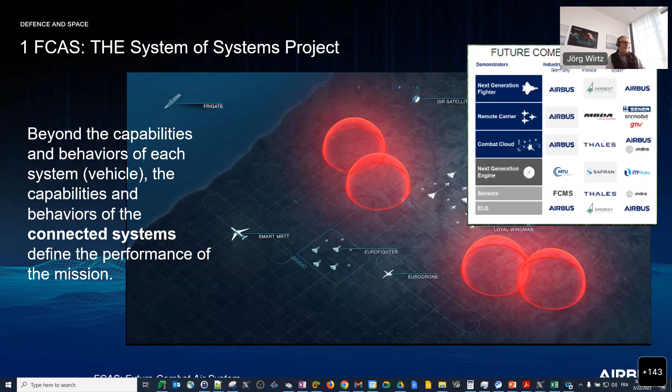Maybe in the next slide I just wanted to give one highlight about the enablement required for such a program, with all the companies involved, as you have seen. So in order to make this complex development happen, it does not work anymore to send files around per email. What we really require here is what we call the common working environment. So some kind of cloud-based environment accessible to all program partners so that they can collaboratively work on the elaboration of the deliverables of the development, the design, and so on.

This kind of working environment is a pillar, an item and a delivery item beside the fighter, the remote carriers and the combat cloud itself. And it shall allow this new way of working. In the focus we see, of course, a classical PLM environment, also a strong MBSE environment here with Cameo and DOORS. We will have an advanced software development environment to enable a CI/CD pipeline and collaboration features. Just to give you an overview that the enablement of tools and methods is key to make this ambitious undertaking work.

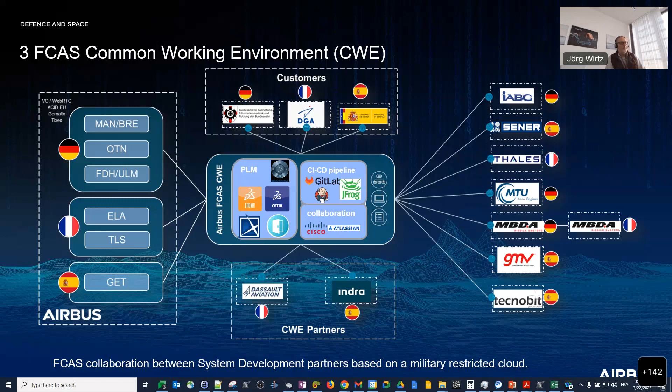With giving you this overview, I would then hand over to my colleague Dominique for the next slide. Thank you, Jörg.

Jörg explained really clearly the complexity of the context. So we have a system of systems to design, which is by essence very complex and composed of complex systems. And as you see also, the organization is rich and a lot of companies are involved which have to interact with each other in different countries with different national security concerns to be addressed.

So in this specific project, we have the system of systems level to be addressed, and this is exactly what UAF brings us. And the similar frameworks developed by the different Ministries of Defense, so NAF, MODAF, and DODAF, had this objective in mind when they designed the framework. So to be a support for capability acquisition entities, for example, NATO.

This is the concern, and keeping this concern in mind, we need all the notions and concepts offered by the UAF, which is approved by NATO. In this concern, we have things demonstrated this morning, for example, the capability roadmaps, identification of gaps, demonstrating how the system will be incrementally supporting the needs in the next 20 years, for example.

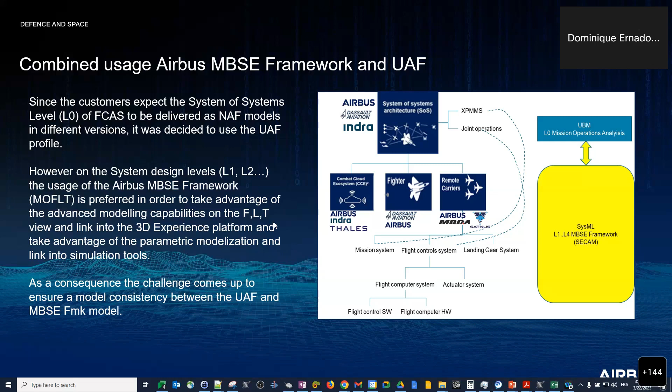And when we hand over to the different level 1s, we also have to repeat this type of layer, including for each level 1 the missions, operational architecture, and so on. So it seems to be a similar framework, but the details are not exactly addressed at the same level. But obviously, we need for each level to keep this global consistency.

So the framework developed by Airbus is also composed of different parts, including a method which is tool and language agnostic. So a method just describes the different steps we have to perform when, for example, we want to describe the missions, operational architecture, and so on.

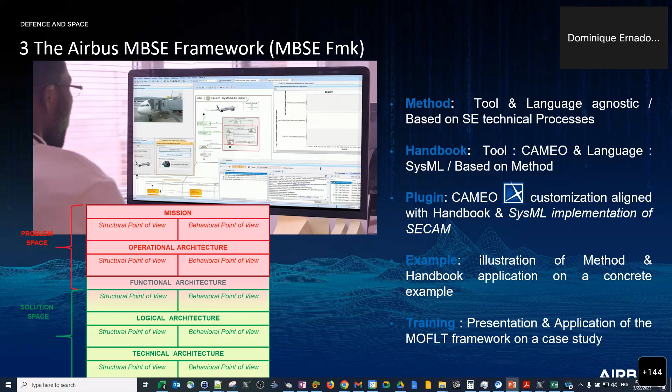There are some handbooks which are more tool-oriented, so mainly based on the Cameo modeling tool and language such as SysML. And we have some plugins to ease tedious activities or tasks and to improve the ergonomics aspect. We also provide some examples and trainings. Just consider we have several hundreds colleagues to train on this specific framework.

I will maybe hand over to Lalitha for this part, which is explaining how we use the NAF in the specific context of FCAS project. Dominique, you are going to share, or do you want that I share? I will continue to share, so I think it's simpler.

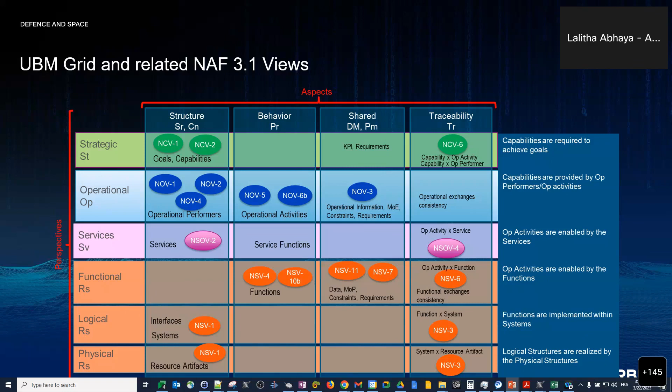Okay. So, yeah, Dominique and Jörg explained, so we are using this combined approach. So I am not going to talk about it again. I think Jörg also said that we have this client requirement. Sometimes we need to deliver in NAF v3.1 format or NAF. There are also discussions about NAF 4, mainly NAF 3 views should be included in deliverables according to the contracts.

So because of these two versions of NAF, we decided to model in UAF. So not every view is created. So we wanted to tailor the framework and provide the methodology. You may see that this UBM methodology is published in INCOSE IS 2021. So I present just a summary of this in this slide. It gives the step-by-step method to create a selected set of views. As you can see, it is really the essential views according to the objectives.

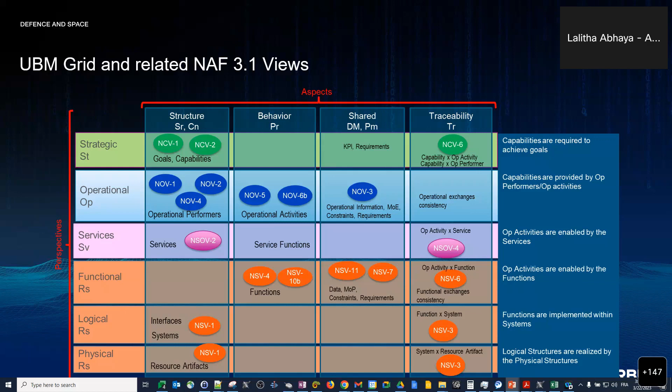Dominique already said that we use it to model mainly the mission, enterprise mission and operational part of the architecture, and of course mainly focused on system of systems level. And then we hand over to the other projects which develop architectures of different product systems such as remote carriers or fighter. Yeah. So you can go to the next slide. I will not detail this slide maybe.

So here you can see how this transition is done from two kinds of models. We have this L0 level UBM model. Mainly we develop enterprise architecture, mission, operational, and we also have some L1 systems, I think Combat Cloud, which is mainly service-based. So we have services and also logical and physical layers, which are modeled in UBM. When I say UBM, it means UAF-based MBSE methodology. So mainly we create UAF views and use a UAF profile or domain model.

So you can see here, normally we have these links. For example, in MOFLT, there are functions. For these functions, we have links to operational activities, as function enables those operational activities, as well as links to services, as functions invoke services. So between two models, we propose these traceability links. It means each L1 model uses the L0 model developed using UBM. And then we provide the traceability between two models.

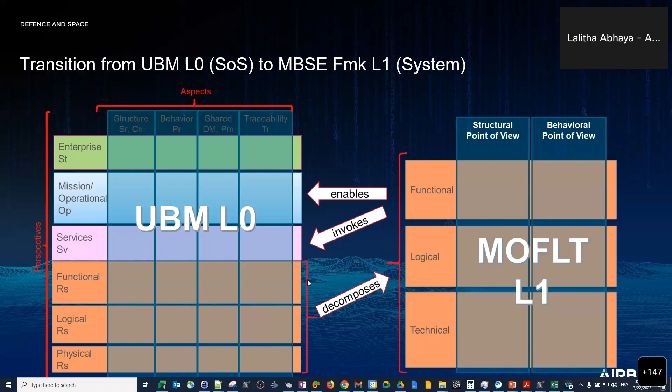Sorry, someone want to say something? It's okay, you can, next slide.

So here I put some details on traceability between UBM model elements and MBSE framework elements; when we say MBSE framework, it is the same, MOFLT. I don't know if I have enough time. So functions, you can see these functions in L1 MOFLT. There is a link, enables, to the operational activity defined in L0 UBM. You see also the functional decomposition link, as well as, as I already said, function invocation of service functions. So this is a little bit more detail of what I presented in the previous slide.

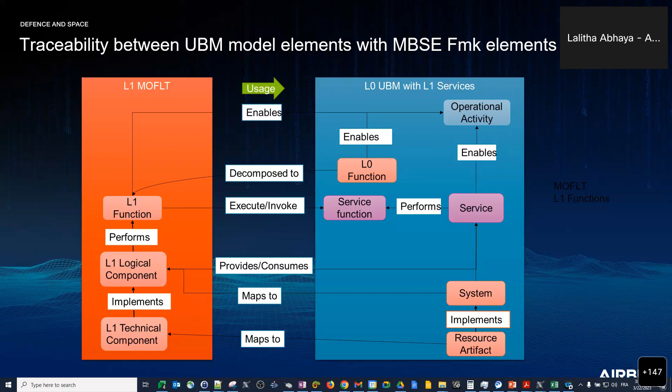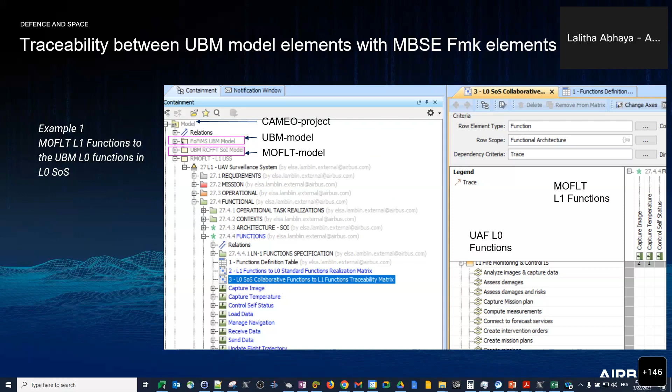Next slide, Dominique. So these are the examples of realization in models of what I presented. So we have traceability matrices between two kinds of models. It means you can see here MOFLT model elements, and also UAF L0 functions, for example. This presents the traceability. Yeah, one example. There is another example with MOFLT OTR elements. OTR means operational task realizations, linked to the operational activities defined in UBM.

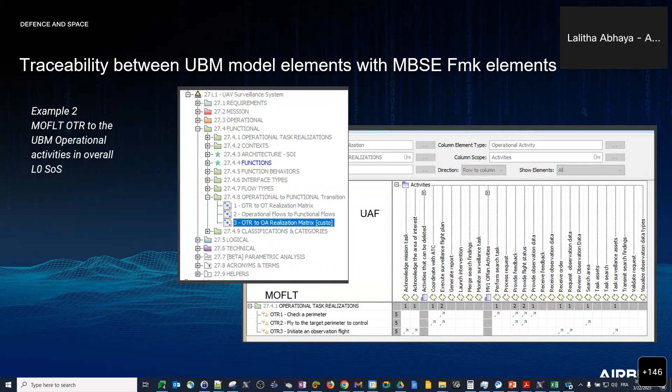Okay, I think this is what I wanted to present. Dominique. Yeah. Maybe first of all, yeah, I take over.

I, by the way, followed also your questions already in the chat, and clearly there were questions on why we distinguish now between logical and technical elements in the MOFLT. The thing is that in the logical layer we can still be a little bit more abstract, simply saying what signal, what message we really use, and then in the technical layer, for example, which bus, which hardware item is used to convey this kind of signal or message. It brings really value add to have this distinction.

And of course, the technical layer then is really also connected to physical simulation, and makes also the link into the technical design in the 3DEXPERIENCE platform, where we develop out of the technical layer the physical breakdown of the product and also, for example, electrical design. So we take advantage of linking now Cameo with our MOFLT MBSE framework, and the underlying data model called SECAM, Systems Engineering Common Architecture Model. This is the underlying meta model together.

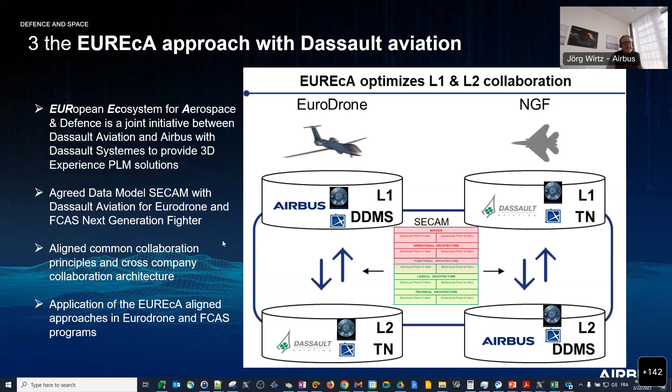5 minutes left. Yes, okay. And this is the last one.

So the conclusion is, in very big projects such as FCAS, defining system of systems for the future, we have to face two realities: the complexity of the system itself, but also the multiple contributors and customers coming with their own requirements. So compatibility with the standard for some models, and alignment with best practices between the different partners. Each of them is coming with their own method, and the EUREcA project we just explained is an initiative to harmonize and find some consensus on the common best practices. So these are additional difficulties, and also to provide some specific environment to work.

So we have in this context a requirement to provide models in UAF, and this is really a good point for us because we have also this capability acquisition to analyze. And we demonstrated that we need also to complement with other specific frameworks to address the more technical aspects. So the reality of the big project is that we have to use multiple frameworks. And today, this is technically possible. We have demonstrated that. Having the SysML foundation as a common part for UAF and MOFLT really helps. So we can use a unique tool, or at least exchange between different tools if we are XMI compatible.